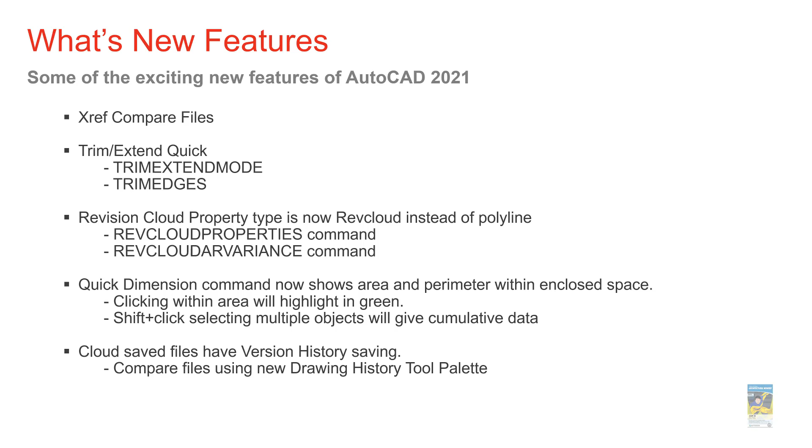Some of the new features we'll take a look at are XREF compare files, very similar to comparing documents. Trim and extend commands have been updated to allow for what's called trim or extend quick. The revision cloud has also been updated, along with some of the functionality inside. The quick dimension command has been updated as well to show area and perimeter of content. And cloud files now have versioning history, which you can access and pull content from.

From the standpoint of the AutoCAD web and mobile storage functionality, you can access all of your cloud storage locations and pull the files and save to those locations. Those cloud-based services are Dropbox, Box, Microsoft OneDrive, and Google Drive.

The versioning history is also available inside a history tool palette within AutoCAD. Lastly, you can access the blocks within those cloud-based files, but only through Dropbox, Box, and Microsoft OneDrive. Google Drive is not supported for block access at this time. Also, the blocks palette used to work with this functionality, the drawing tab, has been renamed to Libraries. So let's go ahead and jump into AutoCAD to take a look at all of these new features.

So here I am in AutoCAD 2021, and before I jump into the files and start showing you some of the new features, I'm going to go ahead and open up Chrome. You can see that in Chrome, I have several tabs open, and in the tabs, I have different application cloud functionality. We've got Box, Dropbox, Microsoft OneDrive, and Google Drive.

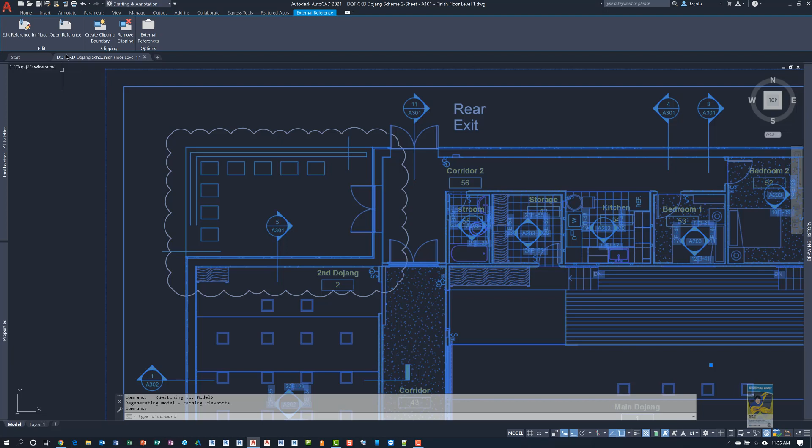Let's take a look at some of the features and how we work with the software. I'm going to head back over to Model Space and zoom in over here. I know that this file is an XREF. If I select it, I can click Open XREF, or I can double click and edit XREF in place. Either way, it doesn't really matter, that's standard XREF functionality. I'm going to click Open Reference. It'll open the file and then I can start doing some work.

Let's say I decide to use some of the new trim and extend command functionality. Here I have some green lines that are supposed to represent line work for a low wall for the landscaped area, and I want to extend these two lines all the way down. At the same time up here I want to trim this one back so that people can go in and out this way, and that way they don't go in and out from over here.

When I use the trim command or the extend command, I'll start with the trim. I can go over and just put my mouse over the line work and it will know what objects to trim and what other nearby objects to use as cutting objects. So if I click and click, they go away. I hit enter and I'm done.

If I want to use the extend command in the same fashion, I click extend and then I put my mouse over the line work and it will extend to an object nearby that is logical, as you can see here. And if you keep doing this, it'll keep wanting to push forward.

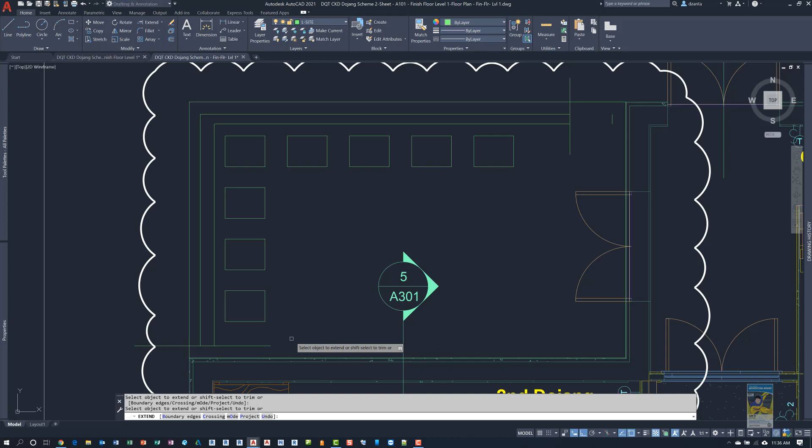In this case, we want to trim this back. So if I hold Shift as I left click the part that I want to get rid of, you can also do this as well. And then since I'm in the extend command, it wants to extend this line over to the section marker symbol, but if I hold the Shift key, it will switch to trimming and it'll allow me to cut that back.

Now, with the new trim extend quick functionality, it's going to use everything that it can see in its vicinity as trimming or cutting objects. So you kind of have to click in sequence what you need. Same thing here. And then I'll hit enter or spacebar and I'm done, and I just delete this little piece. So that's how you can use, for example, the trim extend functionality to do your updated work.

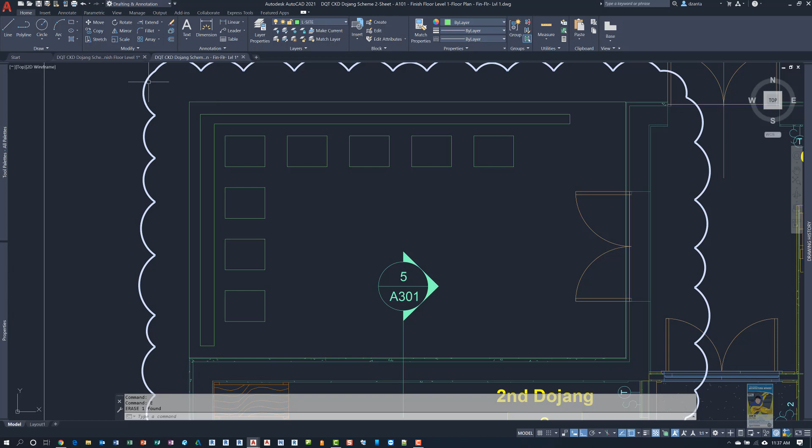Now I'm going to go ahead and save the file, and I'm going to close the file. The reason is because you'll see in the lower right hand corner, it'll give you a balloon notification that the XREF has been updated, but you can also compare the changes, which is checked by default. If you don't check it, it'll just reload it and you can go on your merry way.

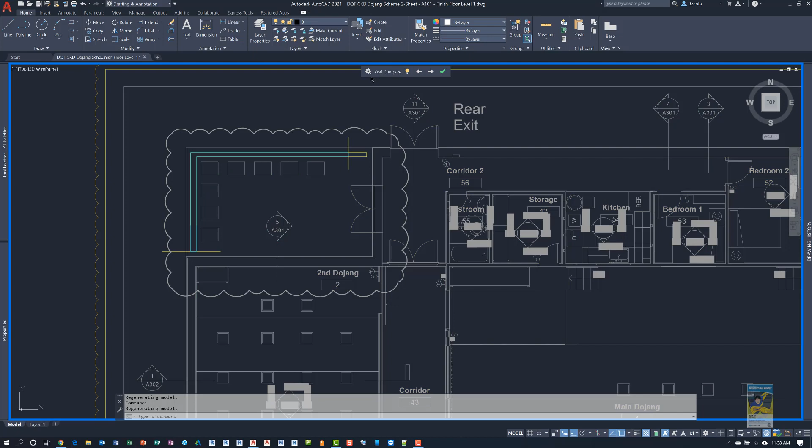But if you leave it checked and you click the text, what will happen is the XREF compare will start up. It looks just like Drawing Compare, and you'll start to see in color what's adjusted and changed. You can click this button to turn on or off the visibility of what's changed. You can click this little cog wheel to get into seeing the differences in the different colors, and the revision cloud being rectangular or polygonal, and the size. If you look very carefully, my revision cloud is going through the entire XREF because it's a single file, and that's what it thinks has been updated.

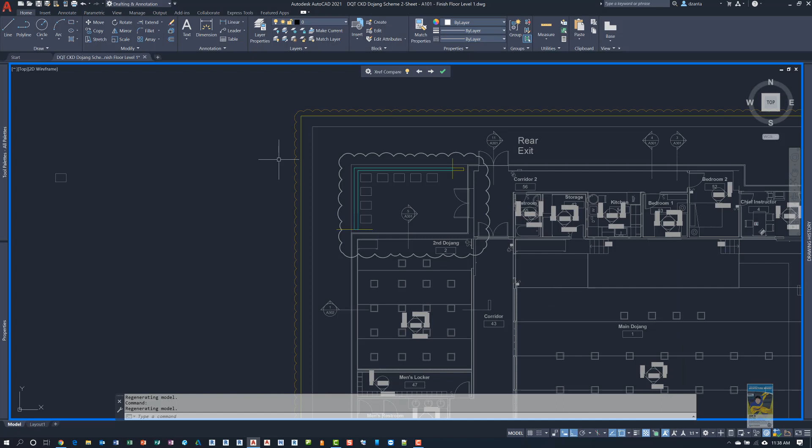I just noticed there's something over here that I need to get rid of, so I'll finish this. I'll double click this time and XREF edit in place. I'll delete this, and it looks fine to me. I'll save it and close it.

Once I have everything saved and closed, I can head back to layout and see the updated changes for my CD sheet.

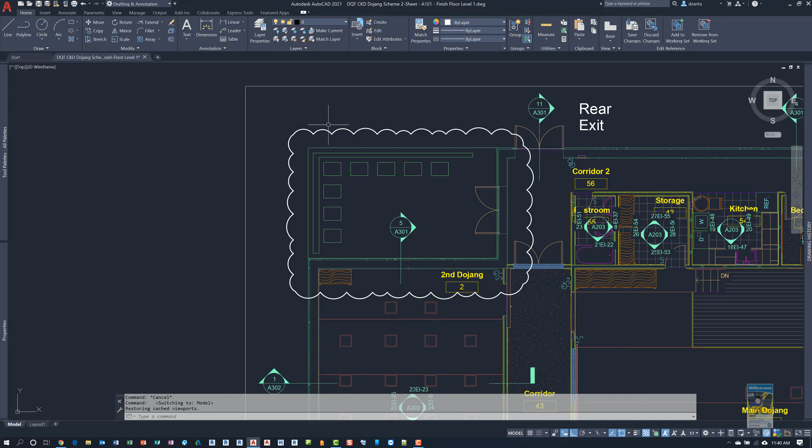Now the revision cloud, by the way, has been set up such that it has updates as well. For example, when we select it, right click and go to properties, you'll notice that the Rev Cloud is no longer a polyline. It is now an actual object called a Rev Cloud.

You can still make little changes and updates to the revision cloud in the properties. For example, I can change the thickness to 2 inches and it makes it a little thicker.

The Rev Cloud arc length can be adjusted using the command called Rev Cloud Properties. When I do this, it asks you to select the Rev Cloud, so I'll select it and hit enter. Then it says select property to change. You click arc length, and right now it says it's at 2 feet 6 inches. If I decide to change it to say 1 foot, everything updates accordingly for that particular Rev Cloud.

Now the arc length itself can be adjusted so the size can be either uniform or variable. To make that adjustment, we type in Rev Cloud arc variance, and by default it's turned on. That means as I use the command to make the Rev Cloud, which is in the Annotate tab, Revision Cloud, I can pick 3 different types.

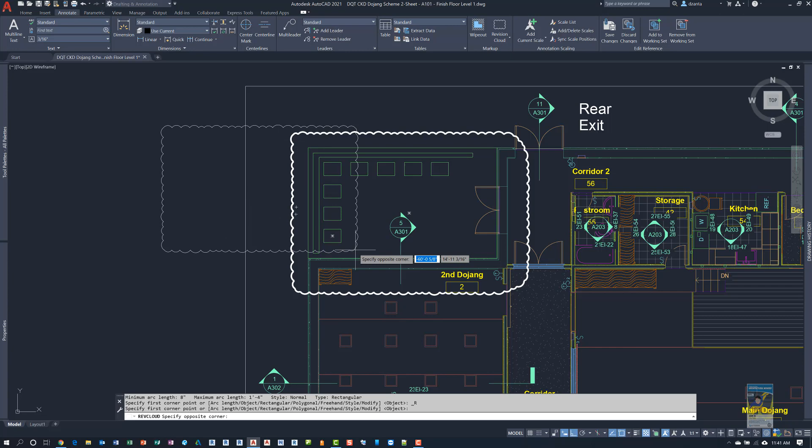I'll pick rectangular again for the sake of ease. As I draw it, you can see the Rev Cloud variance is on, so look carefully - they are of different shape and sizes, which makes it look non-consistent.

I'm going to erase it, then go back to recent inputs and put in Rev Cloud arc variance again, and set it to off. Now when we create a new Rev Cloud, it'll be uniform in size. See that? It looks a little generic to me, a little sterile, so I don't like that.

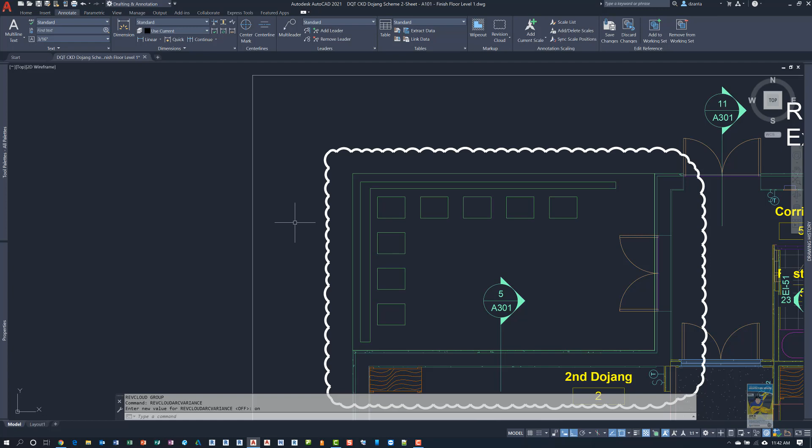I'm going to undo it, then go back to recent inputs for variance and turn it back on. So those are some of the features for the Rev Cloud adjustments in AutoCAD 2021.

We also have quick dimensioning, which has been updated as well. If we head over to the Home tab of the ribbon, to the Utilities panel, we can get into the Measure command and click Quick Dimension. Now what they've done is when you left click in a closed area, it will automatically highlight, fill that area up, and give you the area and perimeter in square inches and square feet.

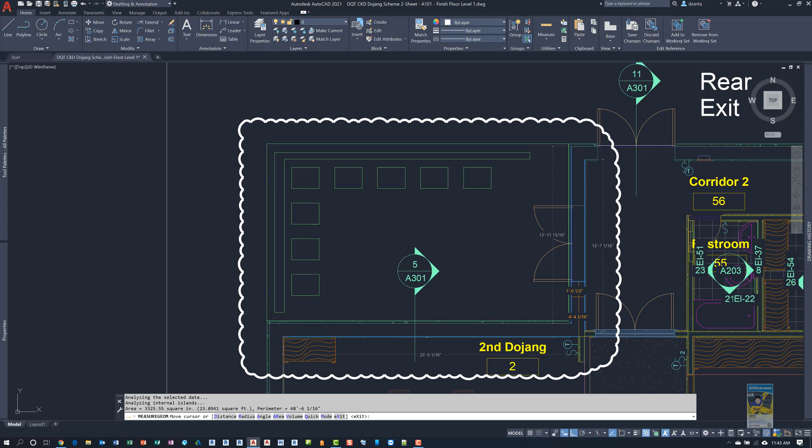If you hold the Shift key down and pick another area to enclose, it'll not only give you the area and perimeter of that location, but also give you cumulative area as well. If you hover your mouse over an area, it still pops up and tells you the quick dimensioning information for that object. Unfortunately, I still can't right click and apply those dimensions to make it a hard 2D annotated dimension on this particular file, so it would be nice to see if they made that kind of update.

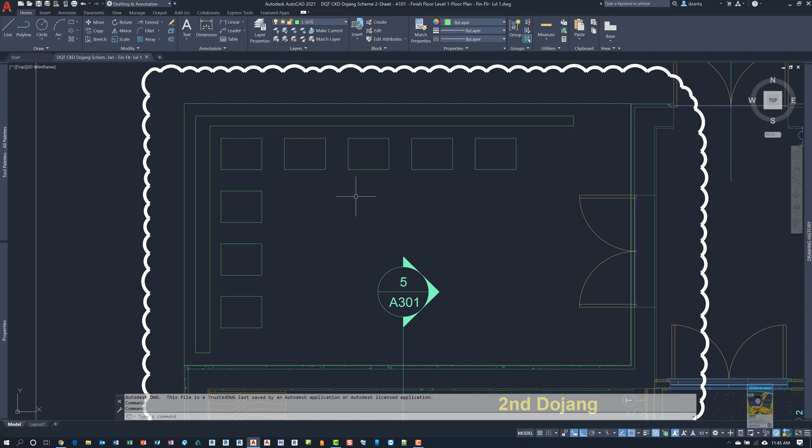I'll head back to layout and save the file, then close it, and reopen the file again. The reason I want to do this is so you can see another feature which has to do with versioning history. So we're going to go Zoom Extents, go back to Layout, so you can see that's the actual XREF file we're dealing with.

We can either look at it here or we can look at the host file. If you go to the View tab of the ribbon, there is a history panel, and if you click that command to turn it on, I have mine docked over on the right hand side. I'm going to move it out so it floats, and any tool palette you can still adjust the sizing. Here you can see this particular file has a lot of versions because I've been working on it for a while today, and you can see all the different versions and times. You can adjust by date, by users, and by duration.

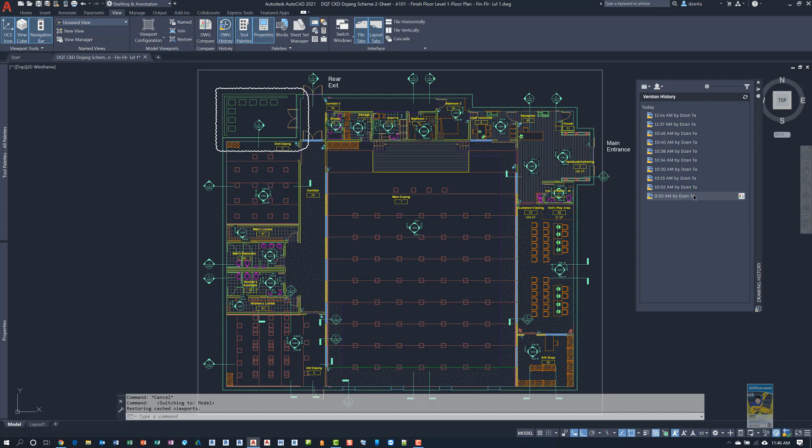Let's say, for example, we want to look at something and compare it to a history file way back at 9:50 a.m. this morning. If I click this little icon, what happens is it'll go into version comparing, just like XREF compare and DWG compare, and you'll see the changes in color very carefully of what is going on. It has the ability to turn on or off the visibility of what's changed.

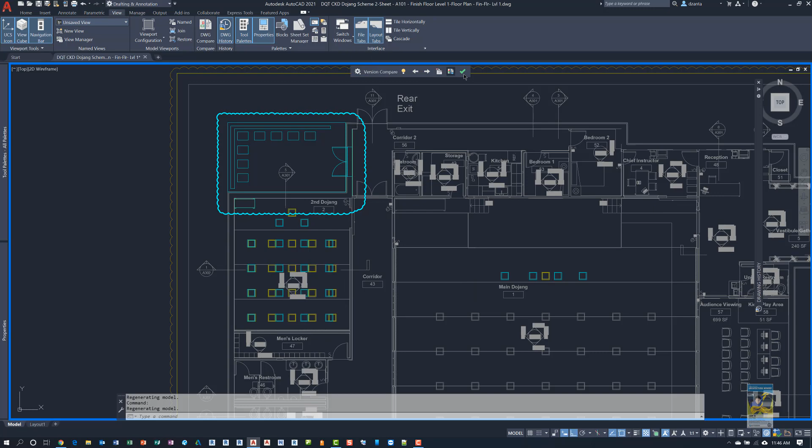Here you can see back then we had to make some changes to this area for the workout center. If you click the green check mark, it gets you out of the versioning history comparing tool and you're back in the main file. So you can use the history functionality to help you understand what's going on with the changes.

Now let's take a look at the blocks aspect of the new features in AutoCAD 2021. I'm going to go over to my versioning history and redock it to the right. I'll head over to the Insert tab, then the Block panel. We'll go to the Insert tab and click Recent Blocks, and what ends up happening is it opens up my Blocks tool palette. You can also go to the View tab and turn on the Blocks palette from here as well.

Let's go ahead and expand it and keep it pinned down, and I'm going to resize it to make it easier for you to see. What they have updated and changed is it doesn't say drawings anymore, it says libraries right here. It gives you the ability to click inside this drop-down list to get access to history files you worked on previously. You can also click Browse Block Libraries, and it will allow you to go into the Open dialog box and get to the files you need.

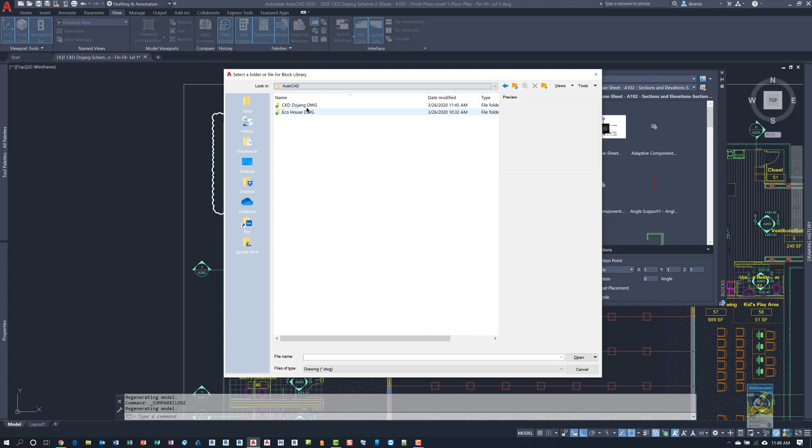So let's say, for example, I pick a different file from a different subfolder, and I grab, say, these elevations, and I hit Open. What happens is you'll get a piece of text telling you it's processing the data, and when it's finished it will show you what it can find from the standpoint of using as blocks. For this particular file, there aren't a lot of blocks for me to pull and use, so I may want to click again and find something else.

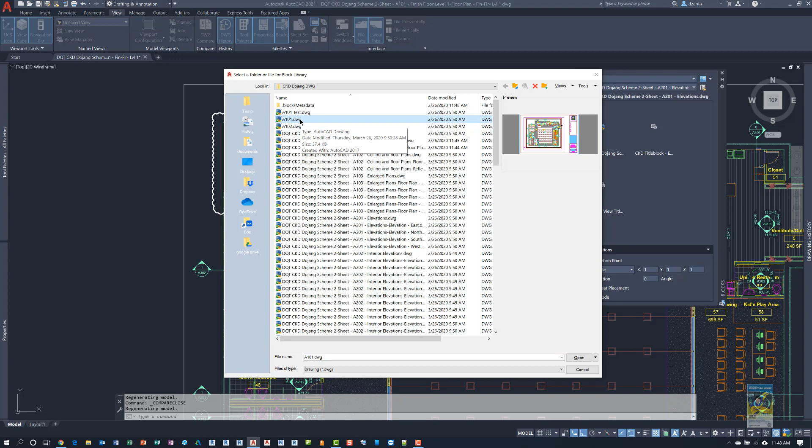So let's try this one. I'll click Open and it processes it. It's just like if you wanted to access a local file within this Blocks dialog box, and you can grab something and then use it. Depending on what you've grabbed, it'll come in and you can place it just like any other block.

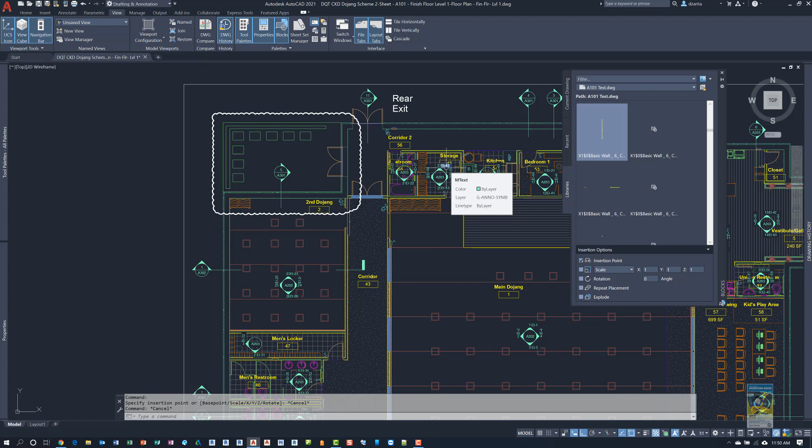So those are all the updates to AutoCAD 2021. I hope you enjoyed watching the video, and just for those who are not aware, AutoCAD Architecture 2021 also came out, and all of the features that are in AutoCAD 2021 updates are also in AutoCAD Architecture 2021 updates. Thank you very much for watching.